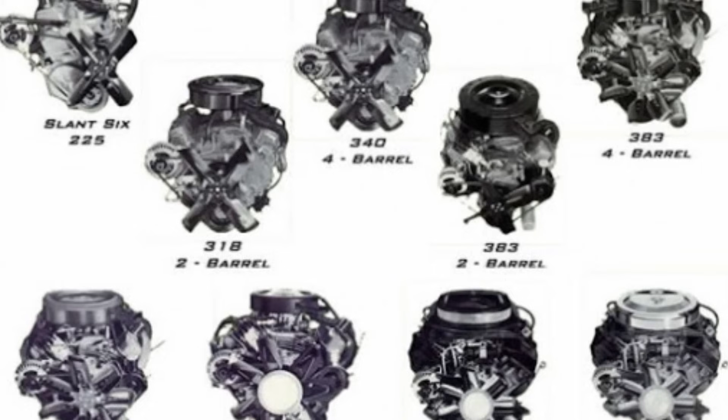The Challenger would come in 2 body styles, hardtop coupe and convertible, with 4 trim levels: the base, SE, RT, and TA. With these 4 trim levels came no less than 11 engine choices: the 198 cubic inch slant 6 at 101 horsepower...

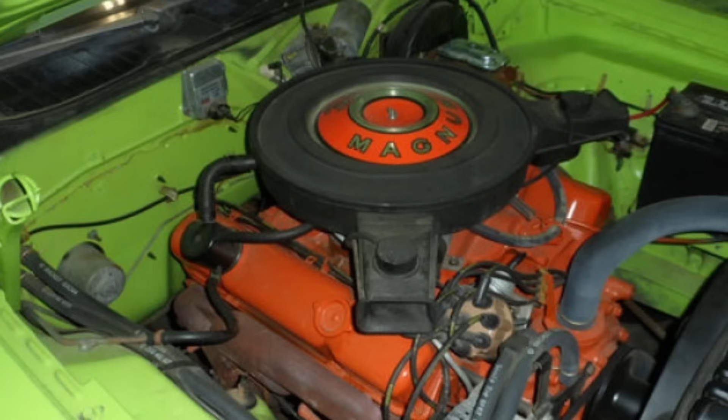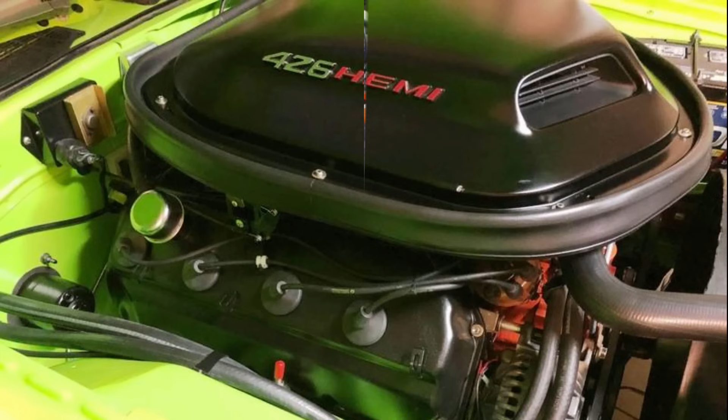...a 225 cubic inch slant 6 at 145 horsepower, a 318 cubic inch V8 at 230 horsepower, a 340 V8 at 275 horsepower, a special 340 for the TA only at 290 horsepower, a 383 V8 at 290, 330, or 335 horsepower, a 426 cubic inch Hemi V8 at 425 horsepower, and the 440 cubic inch V8 at 375 or 390 horsepower.

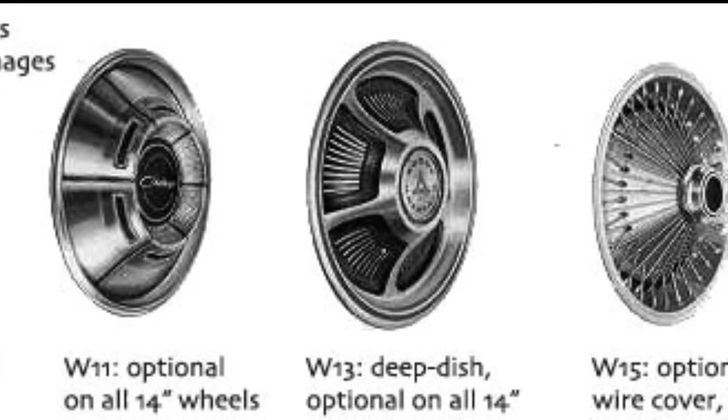Transmission choices ranged from a TorqueFlite 3-speed automatic to a 3-speed manual, finishing up with a 4-speed manual with an optional pistol grip shifter. A various array of stylish hubcaps on 14-inch steel wheels were available, while models equipped with the Magnum engine or the 290 horsepower 340 received a choice from 2 15-inch styled steel wheels.

Any option could be had in either coupe or convertible form, except for the TA, which was a coupe only. The base model made a nice entry-level car for enthusiasts, while the SE model was good for cruising in style and luxury. The RT, which stood for Road Track, was the Challenger's performance offering, utilizing a wide range of engine choices from the 383 to the 426 Hemi and the 440.

The RT had a variety of options that included either a twin scoop hood or a shaker hood.

The TA was Dodge's homologation effort to make the Challenger legal for Trans Am racing, and it only came with a 290 horsepower 340 and 4-speed manual. This model would compete directly against the Mustang Boss 302, Chevy Camaro Z28, Plymouth AAR Cuda, and the AMC AMX.

On the track, Dodge campaigned 2 TA Challengers in the Trans Am series. The 77 car was piloted by driver Sam Posey, and the 76 car was piloted by Tony Adamowicz. While they didn't win the championship, Posey placed 4th overall in the standings, which wasn't bad at all.

The TA stood apart from the other Challengers. It came with a black fiberglass hood with a snorkel hood scoop. Down the side was a black TA stripe, and the car sported a split front spoiler and rear wing.

It's funny how trends or something that was popular back in the day can make a comeback. From fashion to movie remakes, nothing ever dies, it just comes back again in 30 years. The same can be said for car designs. When it comes to car designs, it seems that they started to lose their uniqueness, that look that would make them stand out. They all began to look, well, the same. The cars back in the day may not have had much technology or sophistication, or even the best in safety equipment, but what they lacked in those departments, they made up for with style.

Fortunately, the auto manufacturers realized that the cars they were building were looking pretty much the same and began to experiment by building concepts that were modern with a retro look. Interestingly enough, Chrysler built some of the most iconic retro concepts, like the Chrysler Atlantic and the Plymouth Prowler. Soon after that, we began to see them on the streets.

Some of the most notable were Ford's Thunderbird that ran from 2002 to 2005. And thanks to cars like the Dodge Viper RT10, Chrysler began to bring cars like the Plymouth Prowler to production. In the beginning, they were more of a novelty, cute cars that were a throwback to the past. But then something happened.

Ford released the 2004 GT. Based on the Mark I GT40 from the 1960s, the modern GT was a menacing mechanical work of art that not only looked fast, it was fast, thanks to the 550 horse supercharged 5.4-liter V8 mounted amidships. The new GT was the perfect balance of modern performance wrapped up in a stylish yet functional package that wasn't a copy of the original, but more of an extension.

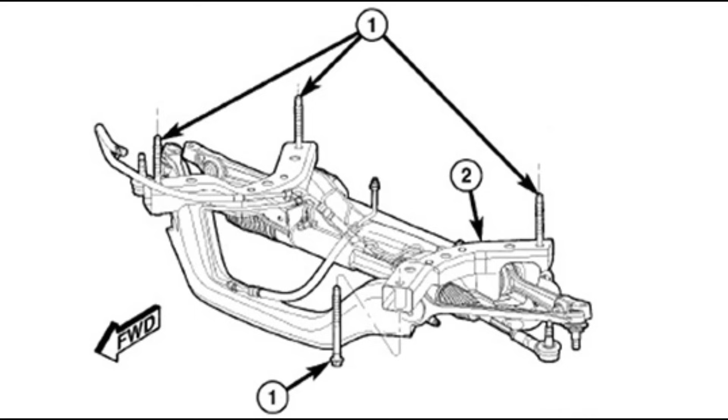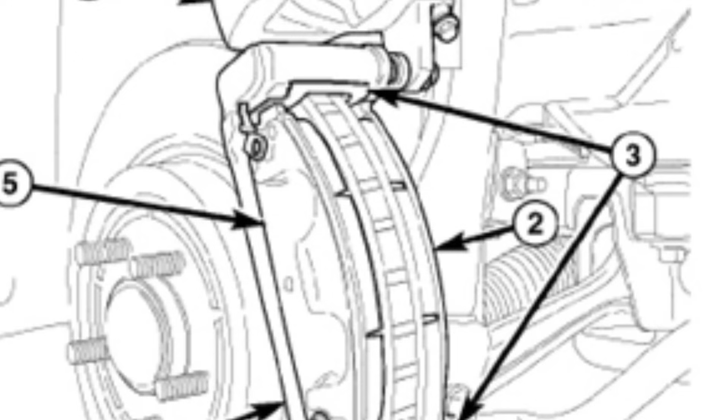Now remember, at this time, Chrysler was owned by Daimler-Benz, as in Mercedes-Benz. So this new chassis took a lot of cues from the 1996 to 2002 Mercedes E-Class. To be clear, they didn't take old leftover E-Class platforms and slap them under new Challenger bodies. What most likely happened is that the engineers looked at what was available and cost-effective and built a new platform to fit their needs based on something existing. What they came up with was a platform that was front-engine, rear-drive, and featured a 5-link independent rear suspension that was already based on a proven design. That provided a sound foundation.

Now, this new chassis was originally developed for the Charger, 300, and Magnum first, since they came out first. But with some minor tweaks and shortening up, the Dodge Challenger chassis was born.

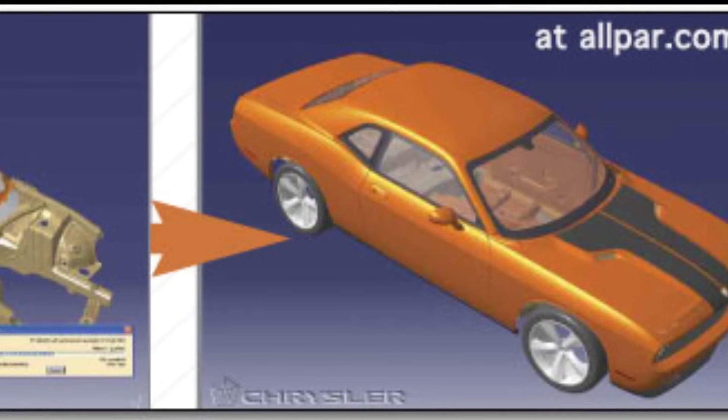Now let's segue for a second. Using an existing platform isn't new. Take a look at Ford's Fox platform, for instance. Not only did it provide a foundation for the extremely popular Mustang that ran from 1979 to 1993, but it was also the base for cars like the Mercury Capri, the Ford Thunderbird and Cougar, Fairmont, Zephyr, LTD, and of course the Lincoln Mark VII.

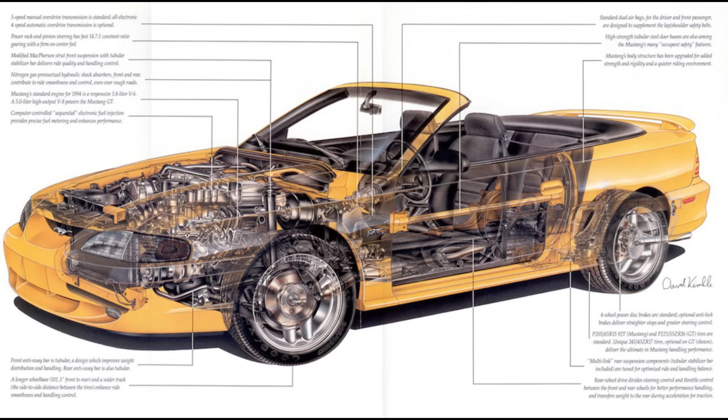But that wasn't the end of the platform. When Ford redesigned the Mustang in 1994, they developed the SN95 chassis from the existing Fox platform. So it's basically a Fox platform with new suspension, which is why it's so easy to swap so many suspension components from the SN95 to the Fox Mustang. When you look at it, Ford's Fox platform was a staple for Ford for over 25 years.

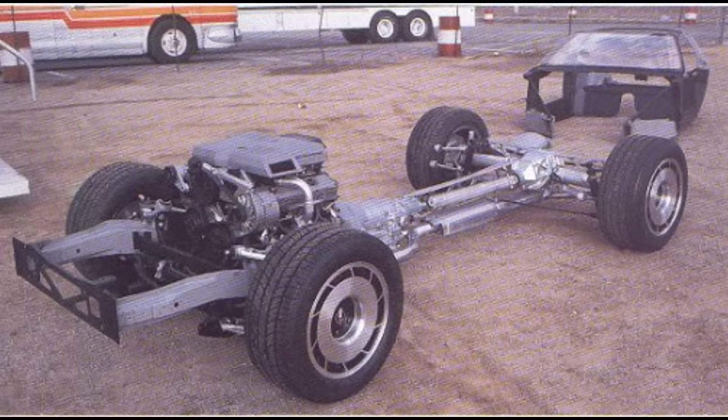The Chevy Corvette's Y platform from 1984 to 2019 is the same thing. If you really want to get technical, you could spot similarities in the suspension design all the way back to the 1963 Corvette. So, getting back to the Challenger, the production design was pretty close to the concept vehicle.

The lines were a little sharper, but overall, retained pretty much the same retro flavor of the concept. The front end of the car featured the quad headlight look, but it's actually two headlights with two large turn signals, which looks a little off, but that's just a matter of personal preference. Out back was the full-width single taillight and incorporated a small lip spoiler on the trunk lip for the SRT-8 models.

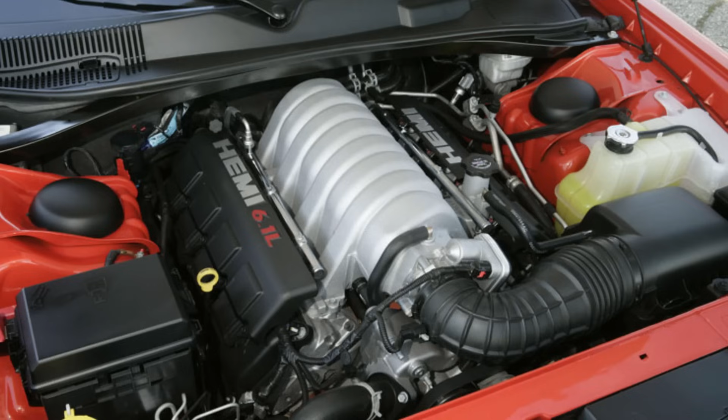It definitely looked the part of a Dodge Challenger. The 2008 model came out with guns blazing, as the only model available was the SRT-8 model. With the crowning jewel of the SRT-8 being the engine, already known to the world as powering the Charger SRT-8, the 6.1-liter Gen 3 Hemi could crank out a very respectable 425 horsepower, backed by a 5-speed automatic transmission.

The car rode on a 4-wheel independent suspension that loosely shared design with the Mercedes E-Class. It never had a solid rear axle. The interior was still attractive and functioning with 4 analog gauges, chrome trim controls, and leather interior with bucket seats. It was reminiscent of the original, but very modern.

Also, each Challenger produced comes with Easter eggs throughout the vehicle, but one in particular is on the windshield. It's a silhouette of the Dodge Challenger.

Dodge produced a total of 6,462 SRT-8 Challengers for the United States, 100 SRT-8 Challengers for Mexico, and 700 SRT-8 Challengers produced exclusively for Canada, making a grand total of 7,262 units. They were available in either Hemi Orange, Brilliant Black, or Bright Silver.

Performance-wise, the SRT-8 Challenger delivered the goods, but to be honest, it was only slightly faster than a stock Mustang GT at the time, and there was no way it was going to catch a 2008 GT 500 as it boasted 500 horsepower and was about 200 pounds lighter. Still, overall, the SRT-8 Challenger was a success on the streets.

For the 2009 model year, Dodge released the complete Challenger line to the public with 3 trim levels.

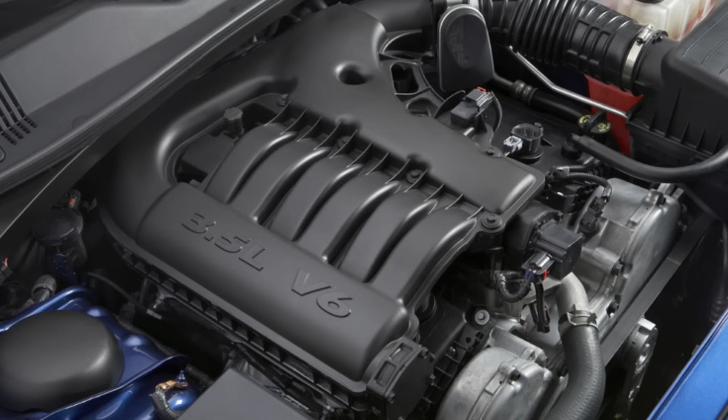First was the entry-level SE model. It came equipped with a 3.5-liter V6 rated at 250 horsepower. Next in line was the RT, powered by Dodge's brand new 5.7-liter Hemi, producing 372 horsepower backed by the 5-speed automatic transmission and 376 horsepower backed by the 6-speed manual.

Both trim levels had a similar look with only minor changes to differentiate them, so an entry-level SE model could look just as fast as an RT. At the top of the performance chain was the SRT-8, with a 425 horsepower 6.1-liter Hemi under the hood. The SRT-8 was virtually a carryover from the 2008 model, with the addition of a 6-speed manual transmission.

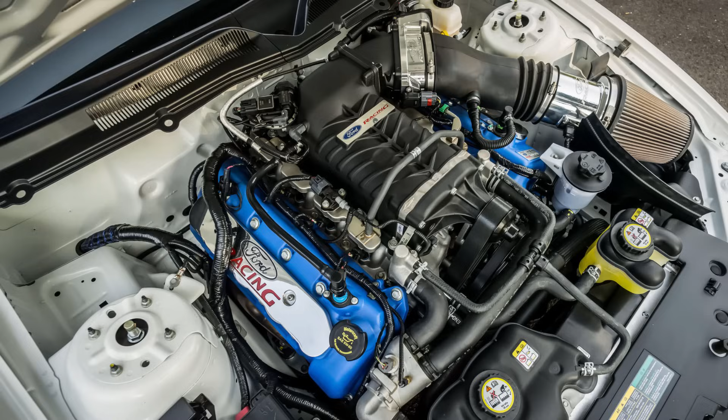One additional model became available for 2009, and that was the Drag Pack. This special edition was built in direct competition to Ford's factory drag car, the Cobra Jet Mustang, that came out in 2008. Equipped with a supercharged 5.4-liter detuned GT500 engine, Ford built 50 of these monsters to terrorize the drag strips of America. So, in turn, Dodge introduced their Challenger Drag Pack.

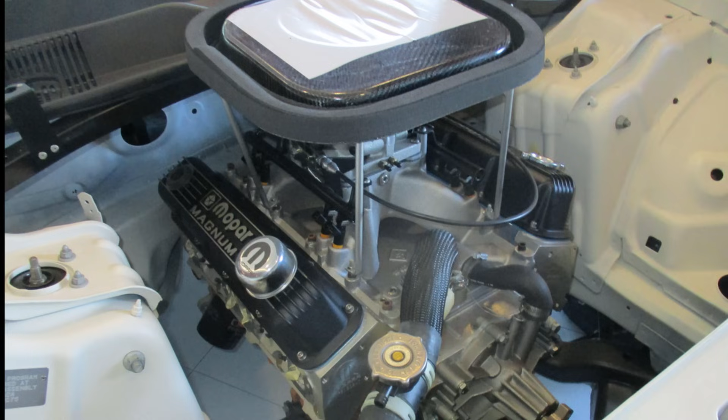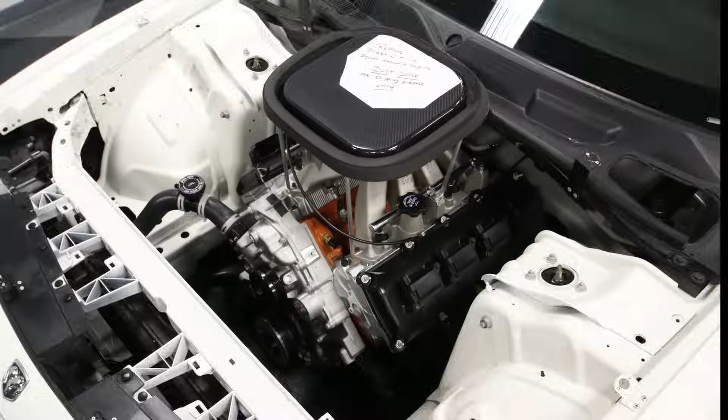The transmission and drive shaft is owner-supplied, with power being transferred to the ground via solid axle. The purpose of the Drag Pack is to give drag racers a factory-built race car that's eligible for over 40 race classes, all for $39,999. It was a good first effort and a great foundation for even more to come.

The 2010 model year brought little changes for the production cars. All the trim levels remained the same, but each level received minor tweaks, like automatic headlights for RT models and steering wheel audio controls. One new addition was a Super Track Pack.

This option was aimed solely at the handling department. They included a 20mm stabilizer bar, larger than the standard 16mm bar, heavy-duty 4-wheel disc brakes, self-leveling shock absorbers, and 20x9 wheels with Goodyear supercar tires.

With the success of the Drag Pack in 2009, Dodge refined the package for 2010. The engine options were narrowed down to only the 6.1-liter Hemi, with a forged steel crankshaft and connecting rods, forged pistons, revised valve lift and hydraulic roller cams, and a modified high ram intake manifold. Transmission and drive shaft were again owner supplied, all to be had again for the bargain price of $39,999.

2011 was a pivotal year for styling. That hideous Ram emblem was removed from the car entirely, especially from the front header panel. But I digress - the production line as a whole remained the same, with some improvement and changes. More notably, the front fascia was updated with a larger lower front grille opening for the RT and SRT8 models.

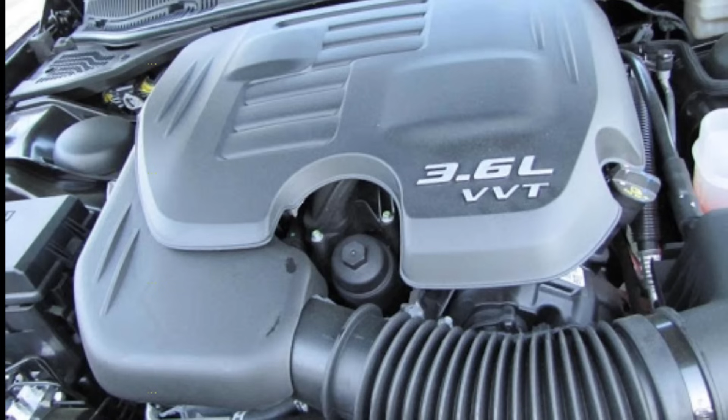Mechanically, the SE and Rally models received a new 3.6-liter Pentastar engine rated at 305 horsepower, while the SRT8's 6.1-liter Hemi was replaced with a new 6.4-liter Hemi, also known as 392, codenamed Apache, rated at 470 horsepower and 470 pound-feet of torque. The remainder of the changes are small and numerous, but all contribute to making the Challenger a nicer car to drive and really improve the reputation compared to the competition.

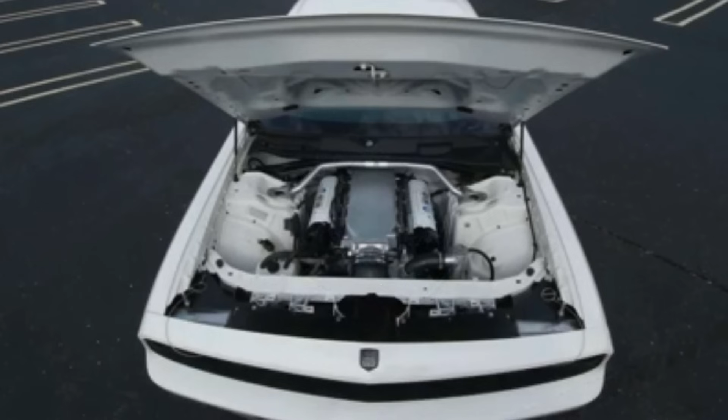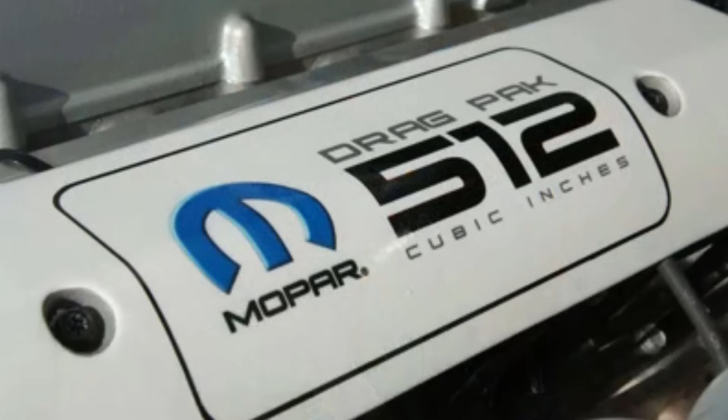Speaking of the competition, Dodge decided to change the game once again with the drag pack option. They didn't even offer a V8 for 2011 - instead, under the hood resided an 8.4-liter V10. This turnkey 512 cubic inch behemoth could crank out 600 horsepower and was built to compete in NHRA stock and super stock classes. Mated to a factory-supplied 2-speed automatic transmission, this would be the largest engine ever offered in the drag pack option. During its debut, it set several NHRA records.

2012 saw a few changes for the Challenger, but significant nonetheless. The base SE and Rally models were renamed SXT and SXT Plus respectively to remain consistent with the other Dodge brands. Also, the RT was given a Plus trim designation. Basically, the only difference between any trim level and the Plus designation is a few trim upgrades. The other change for 2012 was the addition of a 2-mode adaptive suspension for the SRT8 models.

One new addition to the lineup, however, was the Yellow Jacket. It seems that Dodge has this thing for bugs that sting, like the Super Bee, Bumblebee stripes, and now the Yellow Jacket. It came from a special show car Dodge created back in 1970. They wanted to test the waters to see if there was any interest in a Corvette Challenger.

Not a Corvette/Challenger, but a car to challenge the Corvette, which happened to be based off of the Challenger. They took a 1970 Challenger and made it into a 2-seater, gave it a Targa roof and a custom paint color. It hit the show circuit, but it wasn't shown for long as people pointed out that it merely looked like a customized Challenger and wasn't taken too seriously.

So it was taken off and back to the drawing board. It was given a much more aggressive front end and renamed the Diamante. However, it didn't get much further than that.

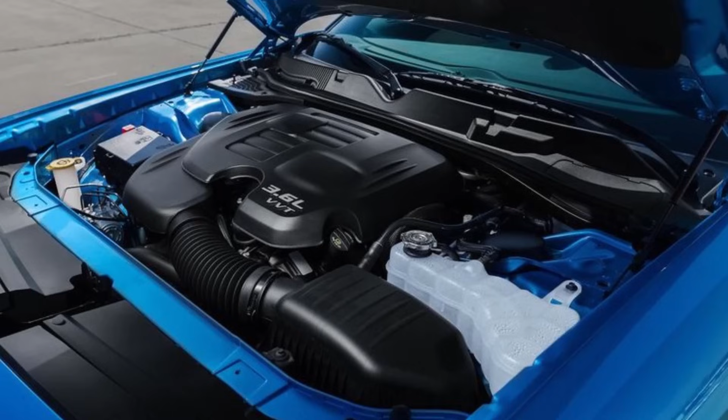Under the hood, the Pentastar V6 remained the base engine for the SXT and SXT Plus, backed by a new 8-speed automatic built by ZF that Chrysler calls the TorqueFlite 8, or the 8HP. This new transmission backs both the V6 and V8 engines. For the RT, the Hemi remained unchanged, save for the addition of an optional shaker hood scoop connected to either a manual or 8HP transmission. Well, if it ain't broke, don't fix it, right?

So now, let's talk about the V8 Challenger lineup. First off, you have the RT.

That comes with a 5.7-liter Hemi that still makes 375 horsepower, mated to either a 6-speed manual or an 8-speed automatic transmission. The RT Plus is merely an RT with an appearance package, but there was also an RT Shaker available. Next up is the new model to the lineup, the RT Scat Pack.

The Scat Pack name is another throwback to the heyday of muscle cars. This new setup begins life as an RT-equipped Challenger with a 6.4-liter 392 Hemi swapped in place of the 5.7. The 392 itself received a power boost of 15 horsepower, bringing the total up to 485, already a significant boost over the standard RT.

In addition to the engine, the suspension was upgraded to Dodge's sport suspension setup featuring Bilstein shocks at all four corners. For stopping power, the 2-piston sliding caliper brakes were upgraded to 4-piston Brembo calipers and 14-inch rotors. The exhaust note is greatly improved with the 2-mode active exhaust system.

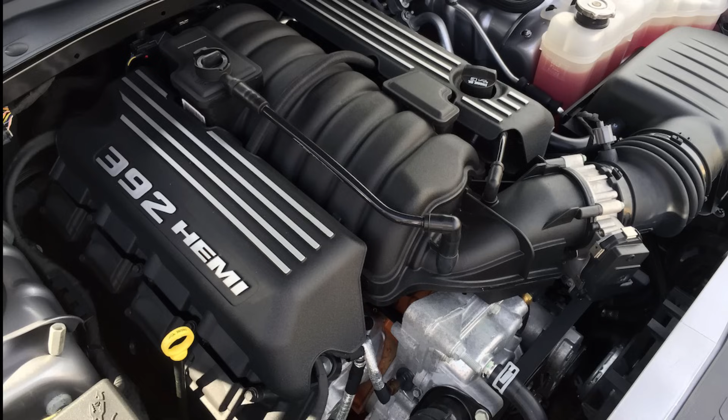Still not enough? Well, the next level package is the SRT 392, formerly known as the SRT 8. Like the RT Scat Pack, the SRT 392 was also powered by the 6.4-liter 485 horsepower Hemi. However, it features pretty much everything the RT Scat Pack has, except with an active suspension system in place of the merely upgraded sport suspension, and upgraded 15.4-inch front disc brakes with 6-piston calipers and 13.8-inch rear disc brakes.

The wheels are also different, upgraded to 20x9 over the 20x8s. Tires grew from a width of 245mm to 275mm at all four corners.

As far as the handling goes, it wasn't bad. Not great, but either suspension setup offered copious amounts of grip in the corners. A far cry from a road course star, but it would definitely be a handful of fun.

Now, to be honest, Dodge could have stopped right there. But Dodge has a way of producing some of the most in-your-face, out-of-the-box, subtlety-be-damned cars on the planet. And frankly, they must have realized that they'd been playing it safe ever since the Challenger's introduction in 2008.

They probably said to themselves, look, we made Charger Daytonas, one of the most recognized cars ever. We built the 426 Hemi, the most iconic engine ever made. We also made the Viper, the American sports car that struck fear in the hearts of every European sports car across the Atlantic. And we didn't do it by playing it safe.

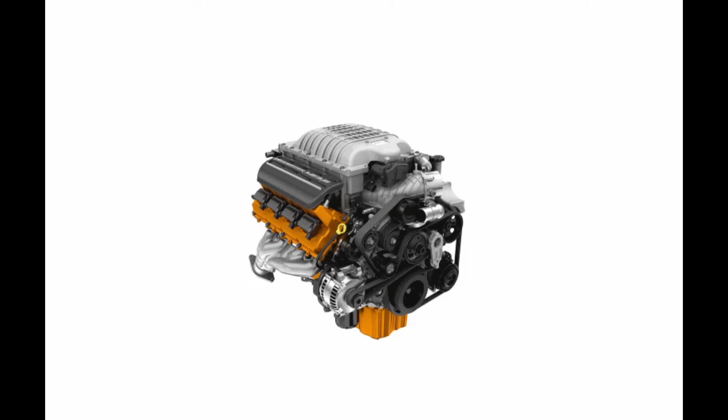New cylinder heads were designed that were dimensionally the same as the 6.4, but strengthened using a proprietary alloy blend. The new changes included hollow sodium-filled exhaust valves, a new camshaft, and a new damper capable of withstanding up to 13,000 RPM. The compression ratio was also reduced from 10.9-to-1 to 9.5-to-1.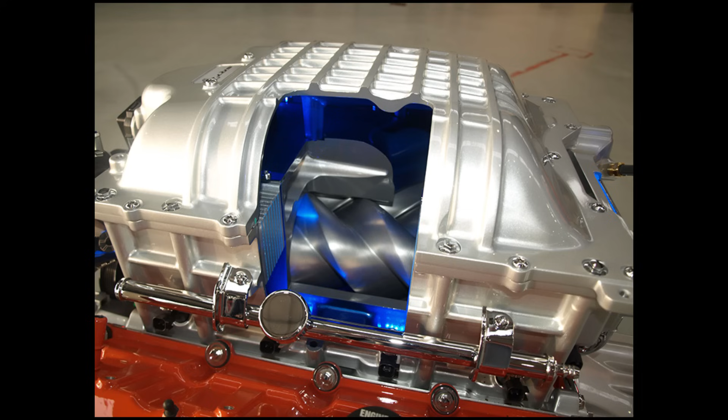The new 6.2 was topped off with a 2.4-liter twin-screw blower, complete with 4 intercoolers to keep the intake charge below 140 degrees at all times. The end result is 707 horsepower at 6,000 RPM and 650 pound-feet of torque at 4,000 RPM.

However, Dodge engineers say that the power output is closer to 800. Either way, in 2015, the Hellcat engine was the most powerful engine ever produced in a muscle car, and was the 5th most powerful engine produced in the world.

The rest of the car was equally as brutish. The choice of transmission was either a 6-speed manual or the new 8HP automatic. The Hellcat featured a redesigned front fascia with a front splitter and larger openings for more air through the front of the car. The inboard lights up front were modified.

Well, the left front to be exact. While it retains the halo, the center of the driver's side light was opened up and made into an air intake, helping feed cold air directly to the air inlet to feed all 707 horses.

It's affectionately referred to as an air grabber. The hood was also revised with air extractors to complement the single intake in the center. The rear spoiler was made a little larger to improve the aggressive look and to provide a little more downforce.

The wheels were also made a half-inch wider at 20 by 9.5, and Pirelli P Zero Neros were used instead of Goodyear F1 Supercar tires, sized at 275s at all 4 corners.

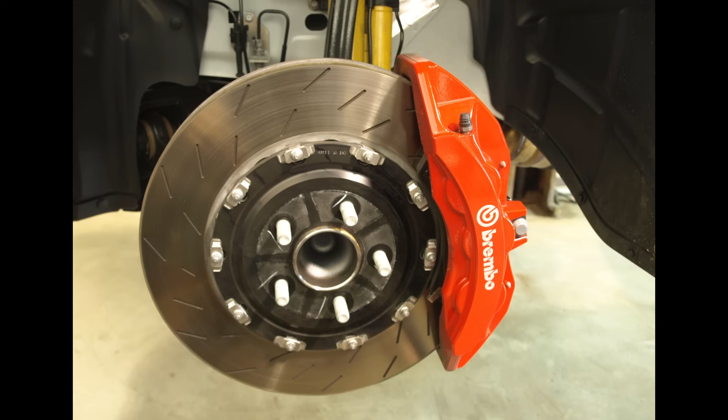The Hellcat uses the same diameter brakes as a Scat Pack, but with upgraded 6-piston calipers up front. The engine breathes through 2.75 inches of pipe with an active exhaust.

The Hellcat came with 2 keys: a black key that limited the power output to 500 horsepower, and for the kill, the red key that unleashed all 707 horses to the rear tires. Also, each Hellcat came with the Hellcat logo placed on each fender, as well as inconspicuously placed inside of the air grabber intake.

With the release of the Hellcat, the Challenger's reputation changed instantly. It was no longer the kid that got picked last - it was getting picked first. It was the new leader of the pack, with muscle car good looks and a bad attitude to back it up. The exhaust note was wicked, and it could smoke the tires at will. The Challenger Hellcat was pure evil, and America loved it. How's that for a lineup?

With all the commotion caused by the long-anticipated Hellcat, Dodge took a break and made very few changes for the 2016 model year. Dodge did, however, make an announcement that they were working on an even more powerful Hellcat for the 2017 model year, and to stay tuned. They did do one other thing for 2016.

That was to bring back the drag pack. The last time Dodge offered a drag pack option for the Challenger was 2011, and since then, Chevrolet has offered their Copo Camaro in 2010, and Ford's been pretty consistent with their Cobra Jet since 2008. The last drag pack Challenger that was offered in 2011 came with a 600 horsepower V10.

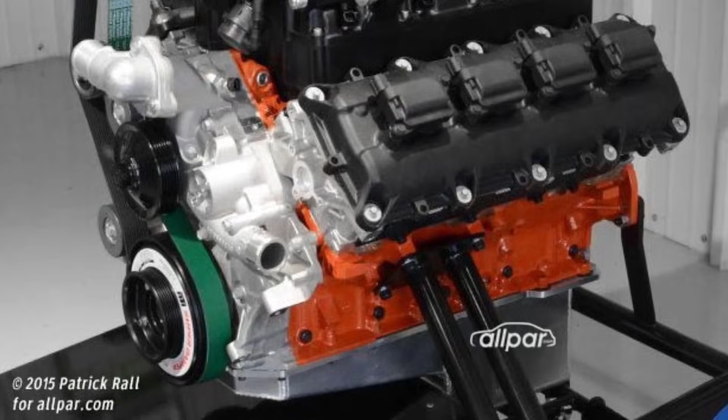For 2016, Dodge offered two engine options: a 5.8-liter supercharged Gen 3 engine, or a Gen 3 426 Hemi. Chevy had a similar package with their Copo Camaro, offering a 5.7-liter and a 427 late model LS engine. Dodge fans liked the nod to nostalgia with the 426, but it was the 5.8 that was the star of the show. The drag pack wasn't a trailer queen either, as the supercharged 5.8 could lay down consistent 8-second quarter-mile times.

The base price for the 426 drag pack was $99,426, while the supercharged 5.8 went for $109,354. A quick tidbit of info: the last three digits of the prices reflect the engine size in cubic inches.

For the 2017 model year, Dodge introduced two models. The first model was the Challenger GT. The GT, powered by the 3.6-liter Pentastar V6, was mated to an 8HP transmission and featured an all-wheel drive system derived from the Charger Pursuit package. The control system could transition between rear-wheel drive and all-wheel drive as driving conditions require, but will stay in all-wheel drive setup while in sport mode.

Also, Dodge decided to reintroduce the TA Challenger. As we stated earlier in this video, Dodge came out with the TA Challenger back in 1970 to make it legal for Trans Am racing, but that was 1970. Here in 2017, Dodge was looking to revive the name and compete against the likes of the Camaro SS and Mustang GT. Think of it as an RT or RT Scat Pack, but with the vintage styling that gives a nod to the 70 Challenger Trans Am car.

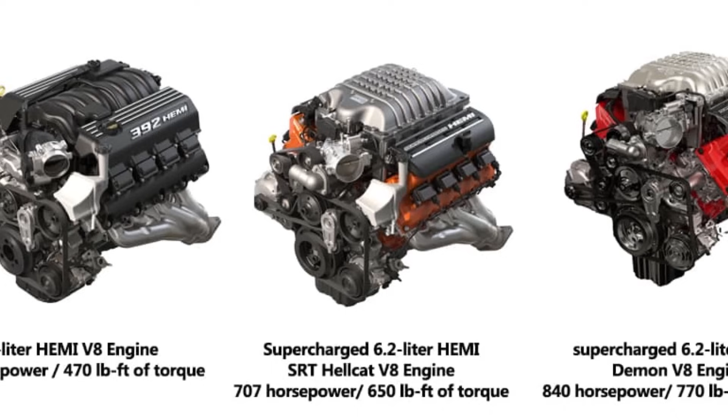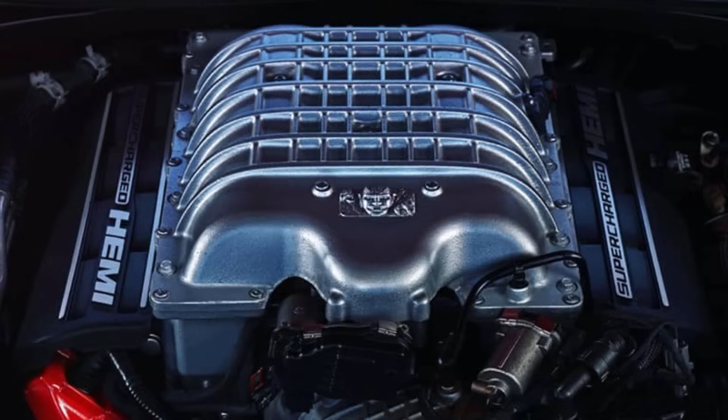The cylinder heads remained the same with a new crankshaft specific to the Demon. On top, the 2.4-liter blower was replaced with a larger unit, displacing 2.7 liters. Boost pressure was raised from 11 psi to 14.5.

With the compression ratio remaining at 9.5 to 1, the new Demon engine produces 808 horsepower and 717 pound-feet of torque on 91-octane pump gas, and will belt out a massive 840 horsepower and 770 pound-feet of torque when running on racing fuel. The end result was beyond anything ever produced by, well, anyone. Whereas the SRT Hellcat was the 6th most powerful production car in the world, the Demon was the 4th.

When that power is transferred to the pavement, 60 miles an hour comes up in a mere 2.3 seconds. 100 miles an hour follows shortly at the 5.1 second mark, and the quarter mile is ripped off in a mind-boggling 9.65 seconds at a blistering 140 miles an hour, making it the fastest production car in the world. And yes, it can lift the front wheels during launch.

All of this for the base price of $86,090. In addition to the Demon package, each new Demon buyer receives a delivery of the Demon Crate - basically everything that's needed to make this borderline street car into a full tilt drag car.

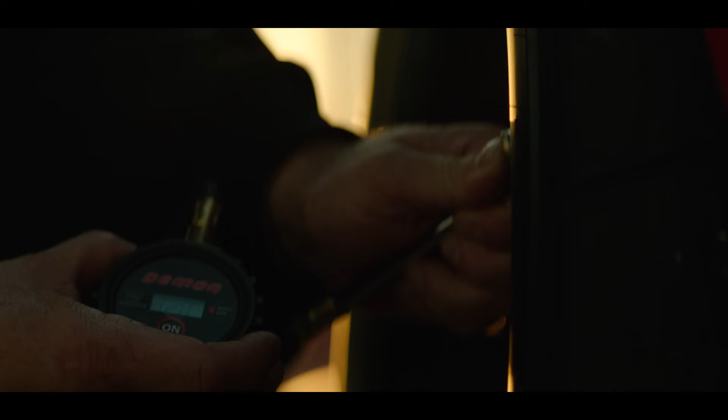The crate consisted of a direct connection powertrain control module, low restriction air filter, high octane racing fuel switch bank, personalized and serialized carbon fiber instrument panel badge, passenger side exterior door mirror delete package, lightweight hydraulic floor jack with the Demon logo, torque wrench with associated sockets, tire pressure gauge, cordless rechargeable impact wrench, fender cover, and tool bag, all with the Demon logo, plus a Demon track pack system and a personalized and serialized badge with a Demon logo. The Dodge Demon was a complete American badass.

Where all other pretenders were precision tools, the Demon was a blunt instrument - a marvelous, violent, massive blunt instrument. And it was loud, in your face, and wonderful.

Was it banned by the NHRA? Yes and no. It's true that the Demon running at full power, top speed, and stock form will not be legal on NHRA drag strips because the NHRA requires all cars that run faster than a 9.99 second quarter mile to have a full roll cage, which the Demon does not have. It has a roll bar, and it runs a 9.65 quarter.

And no, as in the NHRA did not go to Dodge and declare that the Demon is officially banned from the drag strips. If it came from the factory with an NHRA legal roll cage, there'd be no problem. But what an advertising campaign, right? The Dodge Demon showed the world not only what the Challenger was capable of, but also that the 10-year-old platform wasn't finished yet. And there's plenty more to come.